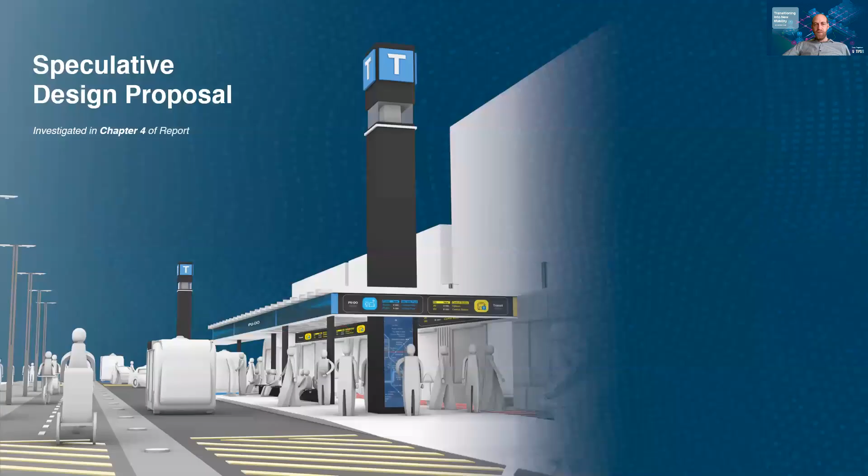So at the heart of this research is the speculative design proposal. It looks at the future vision at a macro scale of a citywide mobility hub network. And it then uses an incremental approach to phasing, which is further broken down into the mobility hub components.

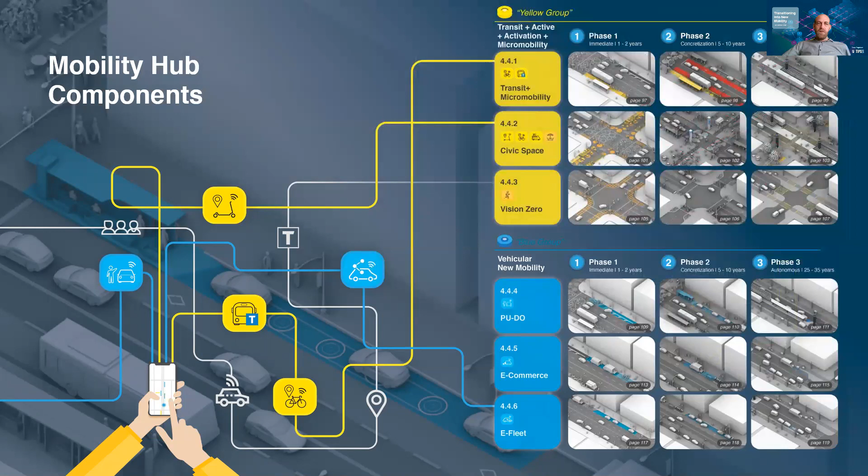These components are broken further into two groups, the yellow group, which includes the transit, active mobility, activation of space, and micromobility, and the blue group, which is the vehicular new mobility group, including the pickup drop-off, which is ride-hail, e-commerce, and e-fleet, which would be car share.

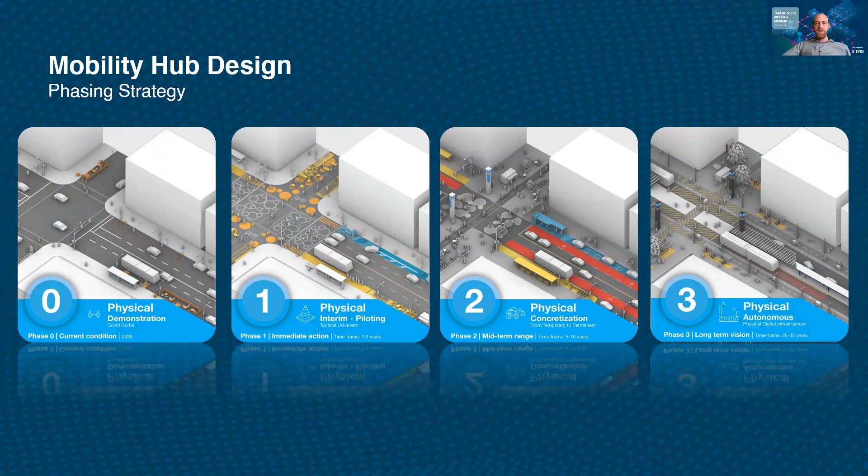Here are the four incremental stages: phase 0 is current, phase 1 is in the 1 to 2 year time frame, phase 2 is the 5 to 10 year time frame, and phase 3 is more visionary, futuristic, around 25 to 35 years.

In phase 0, we can see the different interventions that were done in the COVID-19 pandemic, space for people to gather, space for people to move, experimentation, also experimentation with bus bulbs and other infrastructure.

Phase 1, here we already see a tactical urbanism approach. We're using materials such as paint, planter boxes, parklets, bollards, and these type of activities where we're creating bike streets. And it's important that in this phase, we're trying to unite the idea of the bike streets and the plaza and to anchor it around transit.

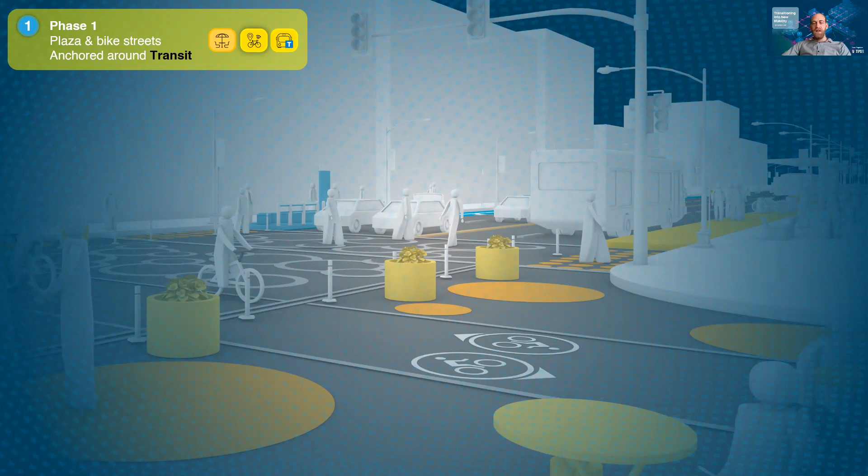In this way, the idea is to take the idea of mobility as a service, which looks at seamless integration between the different transportation modes, not only in the app, but also in the physical urban design of the space. We can also imagine, for example, a parklet for the pickup and drop-off area.

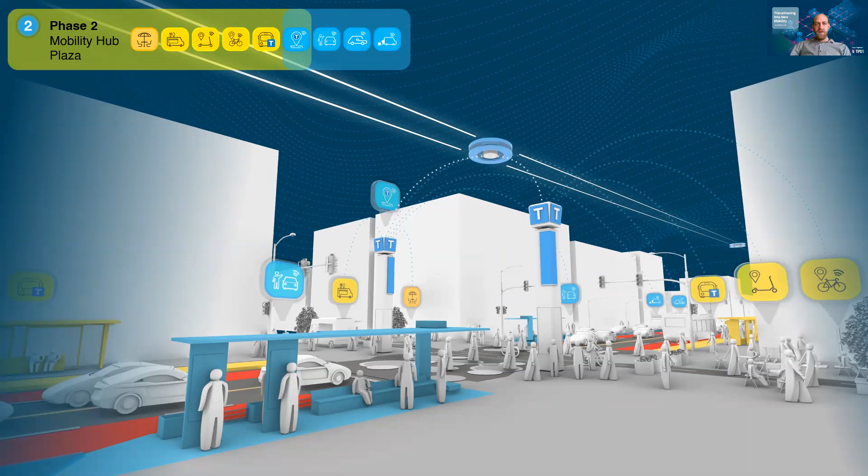And so in phase 2, we see the concretization of all the things that we tested in phase 1. And now it's a more permanent material, such as this example. And again, all the different mobility hub components are all centralized around the plaza.

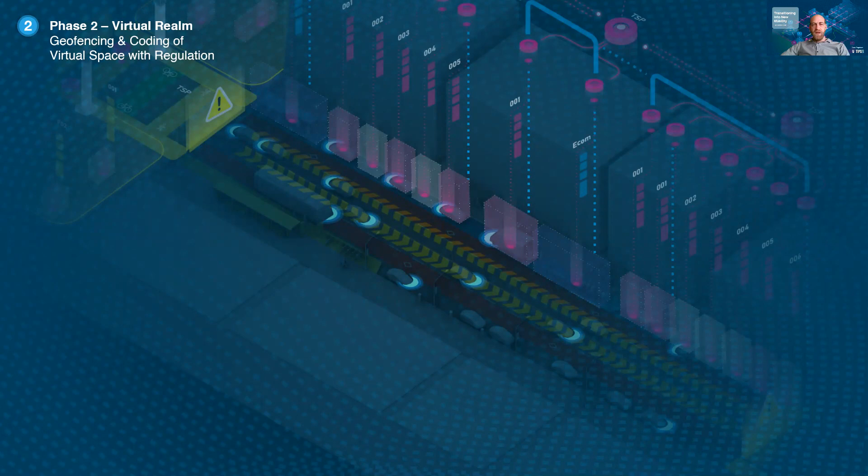The really important aspect of phase 2 is the virtual realm. Here we can use geofencing for every individual curb space, and we will need to code it with the regulations, and we'll really have to design this virtual space, and this is really at the heart of this research.

Just like in the physical world, wayfinding is critical. In the virtual, the user interface is very important. And here, again, this is broken down into the same components that were shown before.

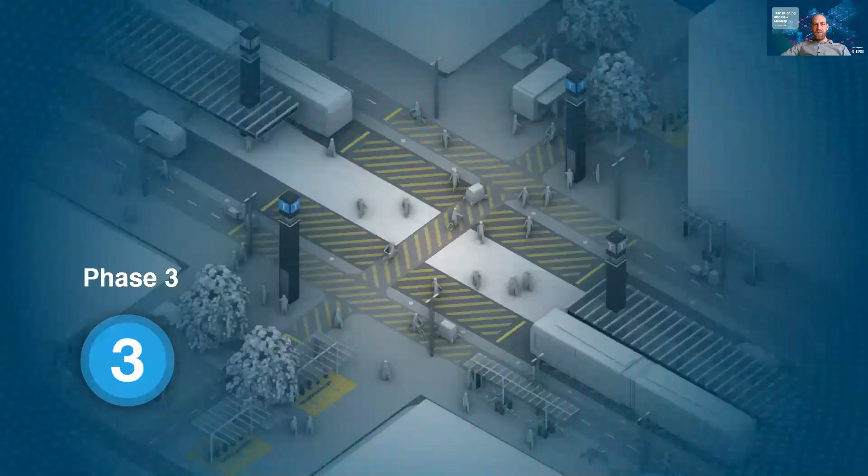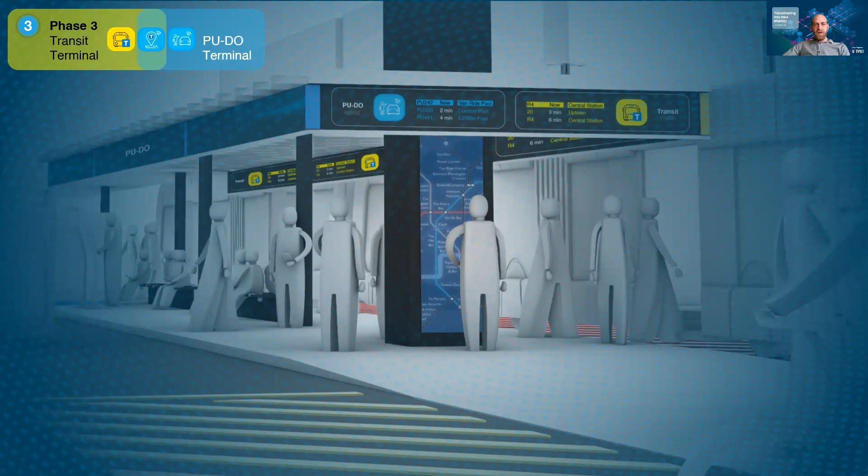Finally, phase 3 is the visionary phase, where there is a much greater emphasis on micromobility. And again, we see here the plaza. And this is anchored around, again, the idea of the transit, only that this time we've been integrating the transit terminal with the pickup drop-off terminal, already anticipating autonomous shuttles and autonomous vehicles,

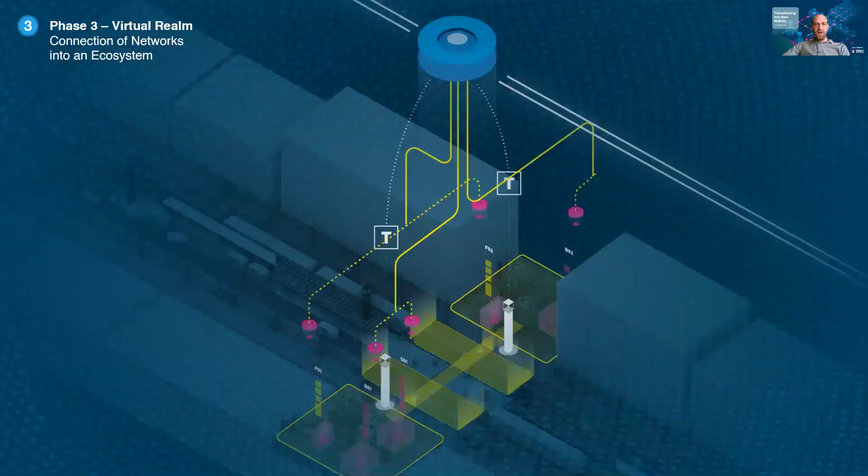but it doesn't necessarily have to only be for autonomous. We could also imagine, for example, e-commerce, where these delivery bots can directly go into the micromobility infrastructure. And this then connects further to the ecosystem of the whole citywide mobility hub network.

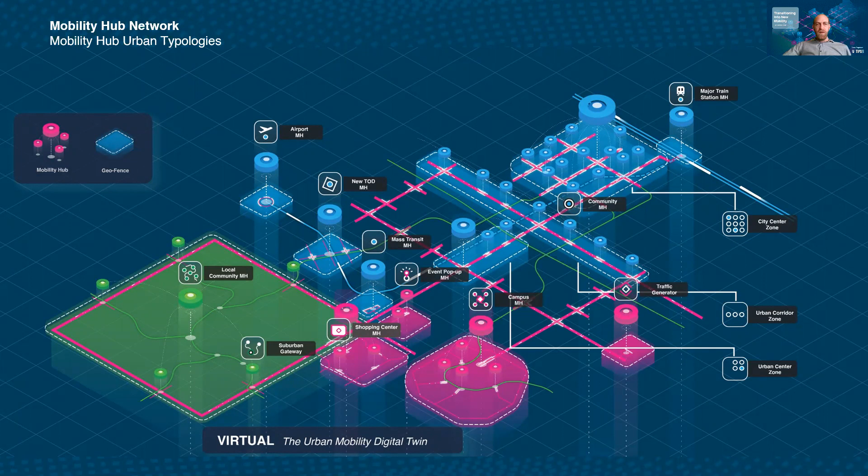So the mobility hub network is really built out of these individual but connected mobility hubs, and they're further broken down into different urban typologies, such as the city center zone, the linear urban corridor or urban center, or airports or shopping centers, or even a pop-up event mobility hub, and so on. And this is then reflected onto the physical realm, which then requires a design.

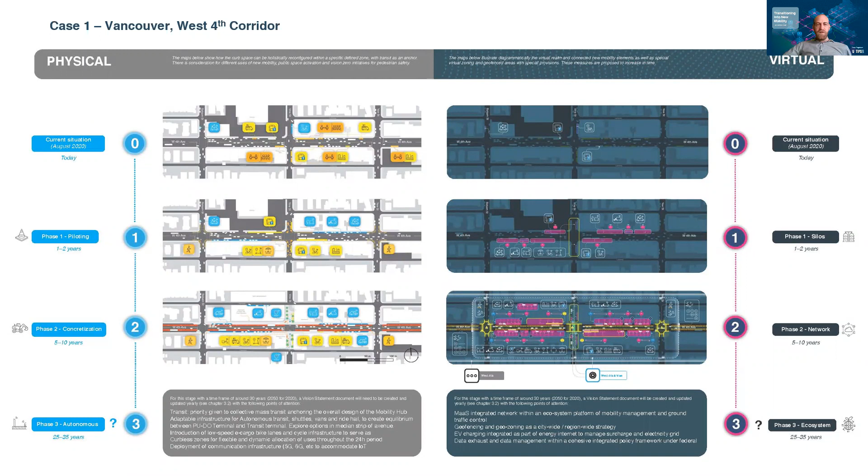So as a proof of concept, in this research, we've looked at Metro Vancouver case studies and 7 different locations, dividing them into urban corridors, urban centers, and campus mobility hub in the suburban typology. Here's an example of case 1, which is the Vancouver and West 4th corridor, where we went through exactly these phases, locating all these different uses of new mobility and looking at the virtual as well as the physical in parallel.

The research also looked at some theory on the digital transformation of public space, and also looked at some theory on transitioning strategy.